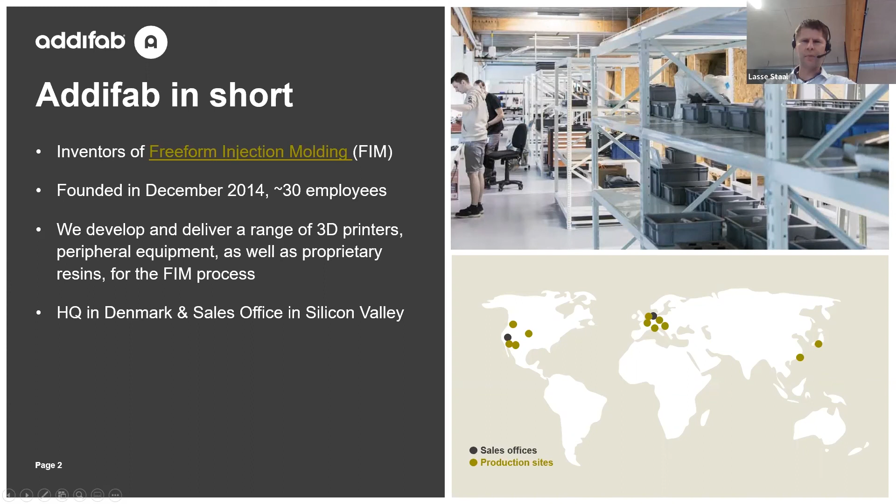If we look at freeform injection molding from the process point of view, what we have developed is a perfect integration between the 3D printing and the injection molding. The objective has been to ensure that product developers do not have to compromise between the design freedom, short lead times, and low startup costs offered by 3D printing, and the versatility and scalability that is the domain of injection molding. So we have developed some software that will help users automate mold design and mold preparation.

We have developed some printers and other hardware that is also available. Of course, with the Nexa offerings, we are dramatically expanding what we can do in terms of size, in terms of productivity, but I'll come back to that a little later.

Following the 3D printing, we will need to clean the printed tools. That's pretty standard. For any DLP, SLA, or LCD printing, resin will have to be removed from the surface of the tooling. And we will also need to post-cure the parts to make them ready for injection molding.

Injection molding happens using standard injection molding equipment like the Babyplast setting over here, which was to take place in the live demo, but I guess I'll have to use pre-taped recording since I cannot hold my laptop and manage the machine at the same time.

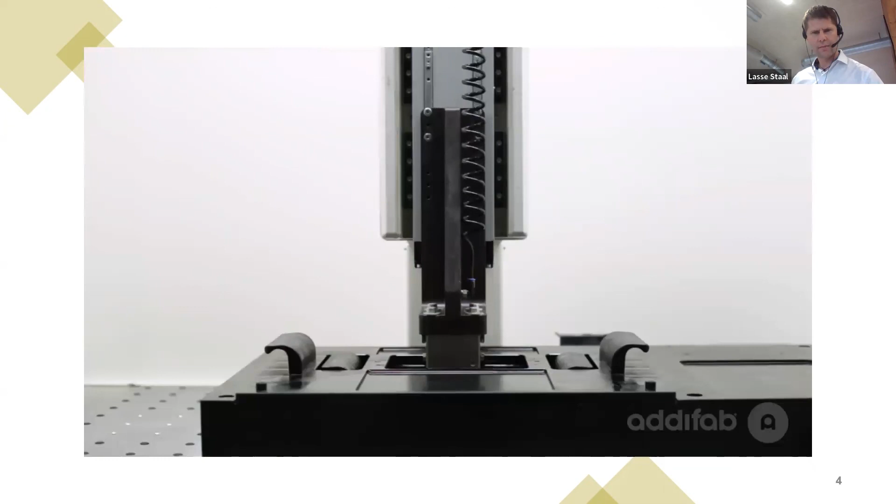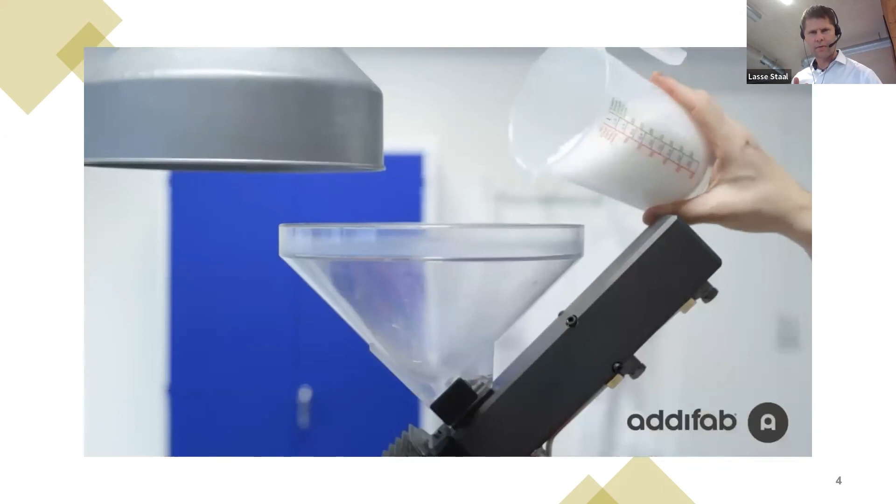So freeform injection molding, as mentioned, is about 3D printing injection mold cavities or injection mold parts for cavities. The printing principle is DLP, or with the Nexa systems, we use LCD, which allows us to create a large number of printed tools in the same process.

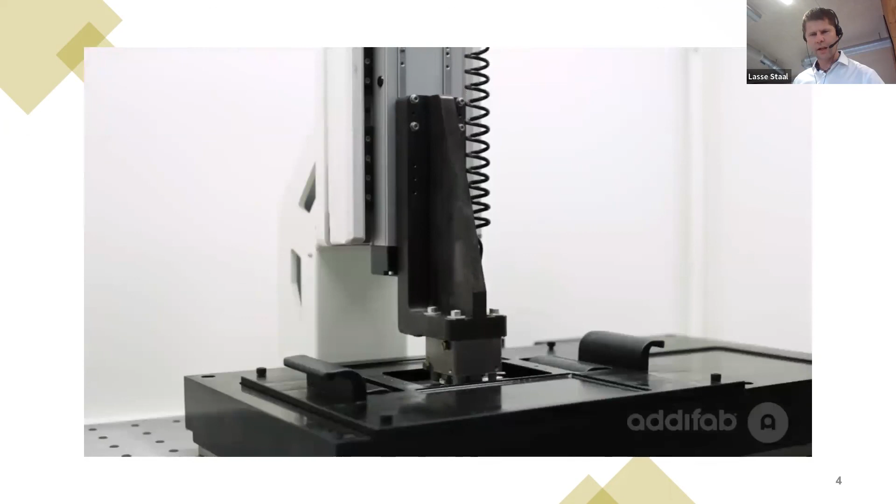When Addifab was working with the Addifab machines, we had the opportunity to print approximately 15 tools with the printer. Now with the Nexa, just to provide you with a little bit of insight about sizes, we can do 120 molds in the same time. That means the time to print one of these injection mold tool cavities is 15 seconds with the Nexa system.

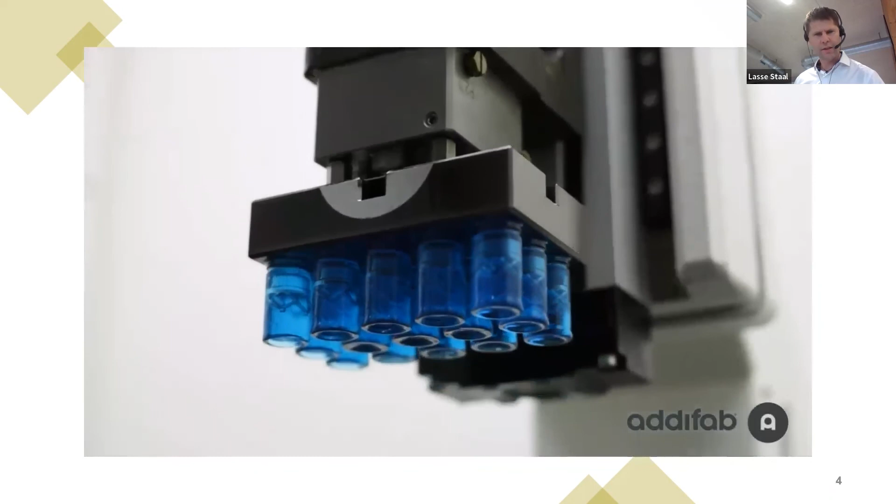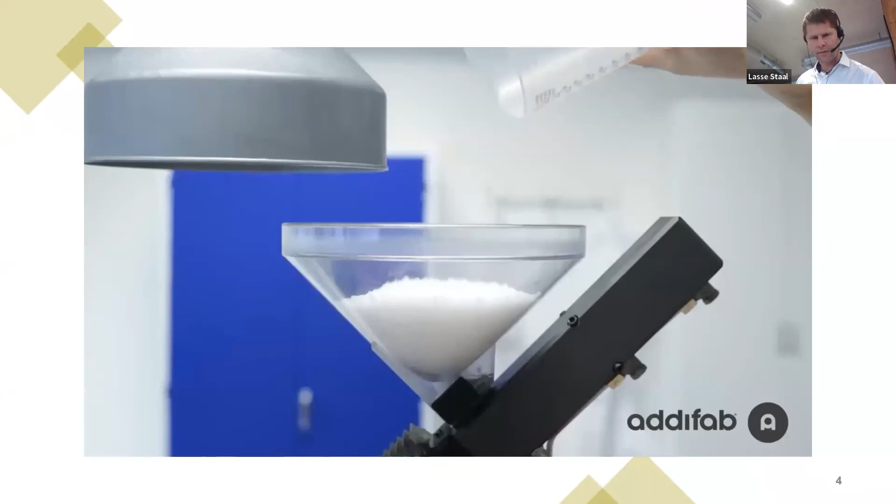For injection molding, we use any standard injection mold machine. In this case, it's the Babyplast, with any granulate you may think of. We do PEEK, we do metal, we do ceramics. The objective is to provide the injection molder with the same degree of choice that he would have with any other technology.

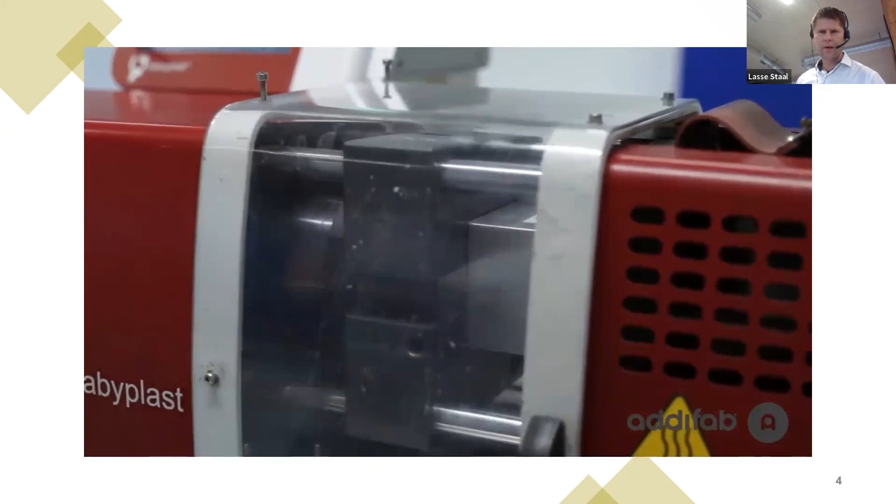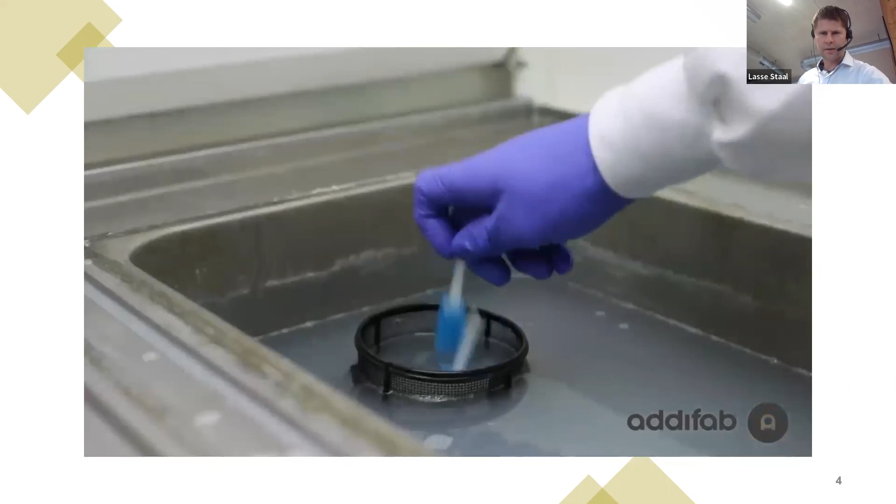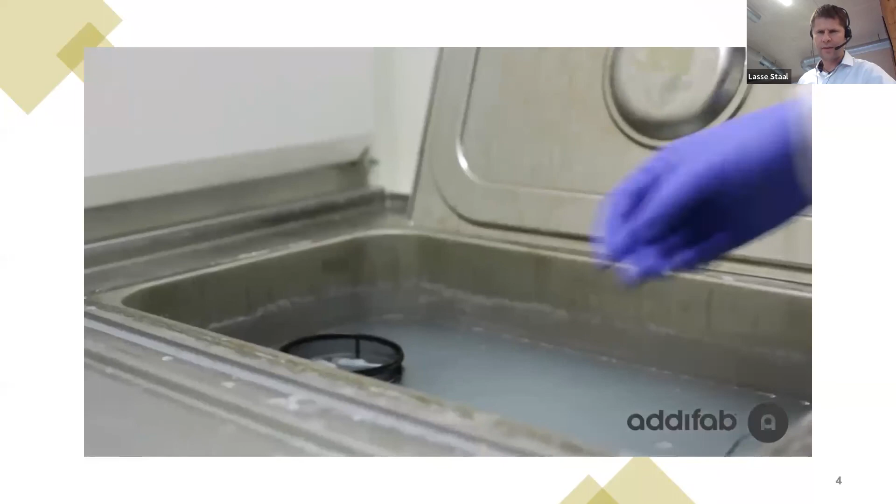And then following the injection, where the material is squirted into the tool, follows the demolding, which is that part which provides the injection molder with an unseen level of design freedom, since we don't have to worry about sliders or split lines or drafts or any of the complications usually associated with injection molding.

So freeform injection molding is injection mold tooling, is injection molding with the key benefits offered also by 3D printing in terms of short lead times, low startup costs. And for your information, the tools we were looking at here have an average production price of a couple of euro, which means that of course your unit costs increase slightly, but compared with the price, the cost, the investment that would be needed for injection mold tooling of this complexity, a couple of euro a shot is pretty trivial.

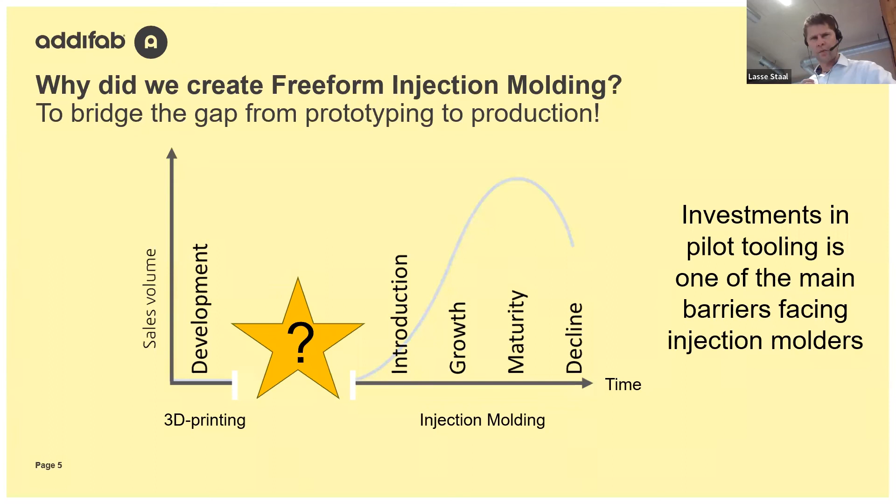The reason why we have invented and are pioneering freeform injection molding is because when you look at product development from the injection molder's point of view, getting from 3D printed prototypes to injection molded products is a key challenge. And the challenge is primarily associated with investments in injection mold tooling.

Of course, we would like to offer a solution that spans more than just product development. One key benefit of using freeform injection molding is that once you define your recipe for injection molding your low volume products, that recipe follows your product throughout the life cycle. This means you may want to migrate to conventional steel tooling for mass manufacturing, but whenever a customer wants a customized version of your high runner product, you can simply resort to 3D printed tooling to meet the demands of that low volume manufacturer.

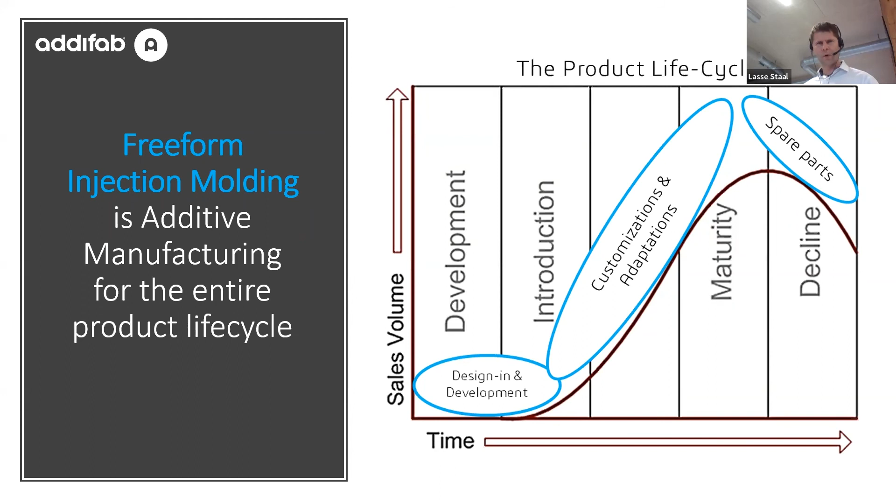When you start talking about spare parts manufacturing later in the product lifecycle, you'll be happy to know that instead of stockpiling items that may have to be written off and discarded at the end of the product lifecycle, you can produce your spare parts on demand, reusing that low volume production recipe you compiled in your design phase. So for all intents and purposes, what we are delivering with freeform injection molding is a total product lifecycle management solution.

The reason we are teaming up with Nexa3D is because at Addifab, we have been dedicated to manufacturing small, high precision items, but we've also received a lot of requests from customers wanting bigger printers and printers with higher productivity. So what we've been focused on until today has been small parts up to 5 centimeters and batch sizes up to about 20.

Now, with the Nexa, we can substantially increase our approach to market. We can substantially increase the number of applications we can support with freeform injection molding, and we can support a much higher level of production than we have previously been able to do.

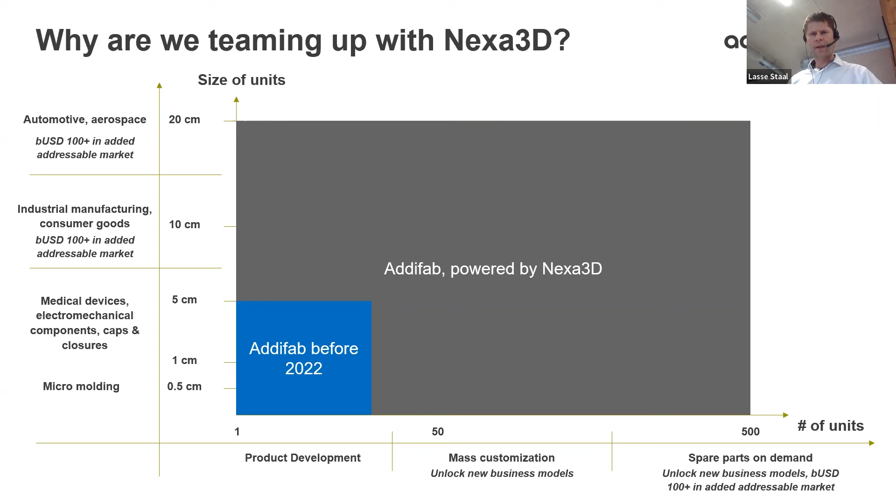People are often asking us why we are different from conventional 3D printed tooling. We are not the first, we're not the only company in the world offering 3D printed tooling, but I think the design freedom that comes from having soluble tooling is a key part of what we offer. Another key part is the very extensive selection of materials that comes from not having to optimize for as many shots as possible.

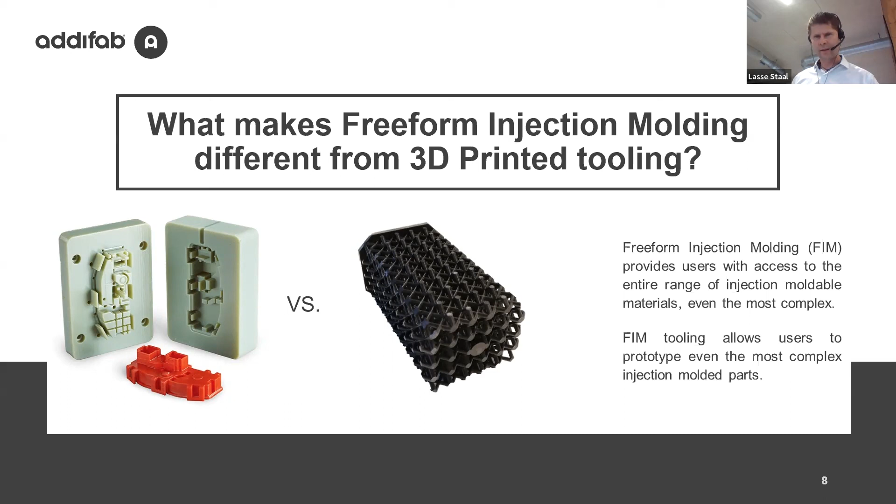What you see in this image is a black part made in a high performance PPA with a 30% carbon fill. This part has a weight of 70 grams. It carries more than 4.5 tons of load, and it is enabled by the solubility that is the key feature of freeform injection molding.

When we look at freeform injection molding compared with conventional injection molding, one thing that is evident from the start is that when we want to manage complex components, we can do so at a much lower price point. This is an example of a fairly complex tool, with a couple of side actions and a lot of complex split lines. You could basically achieve the same functionality with a one-piece 3D printed cavity if that cavity was soluble. That means that with freeform injection molding, especially high complexity components become a lot easier to source in low volumes.

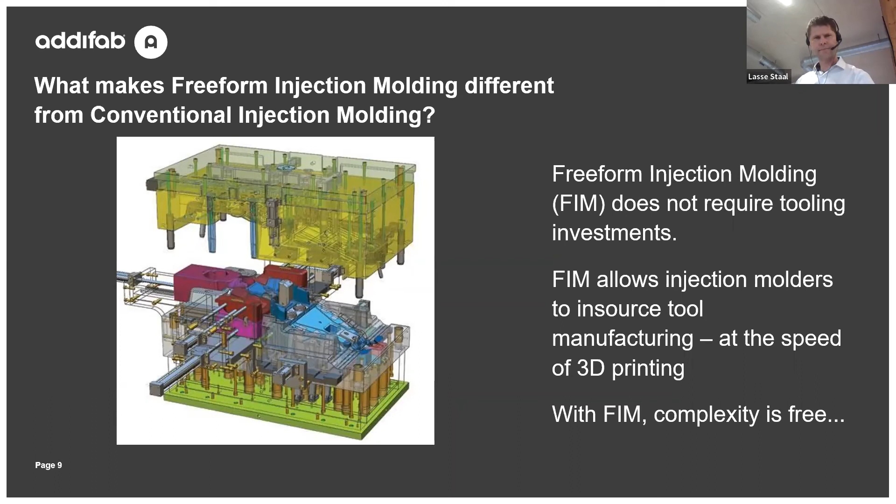A topic that is creeping up on the agenda in a lot of places is sustainability. At Addifab, we decided to investigate the environmental profile of freeform injection molding when held against conventional metal tooling. We carried out a life cycle analysis with Deloitte, the world-leading auditor handling the mathematics. What we saw was a substantial reduction in CO2 emissions associated with the product development.

As a matter of fact, freeform injection molding allows us to reduce carbon dioxide emissions by 75% compared with reference pilot tooling, in this case for the manufacturing of a 4-part medical device for preclinical trials. Most of those savings come from not having to iterate in a hard tool, from not having to manufacture a hard tool, but we also see substantial savings in not having to run in a hard tool, because with freeform injection molding, you shoot once or twice, and then you're basically at the stage where you should expect to see fully molded parts.

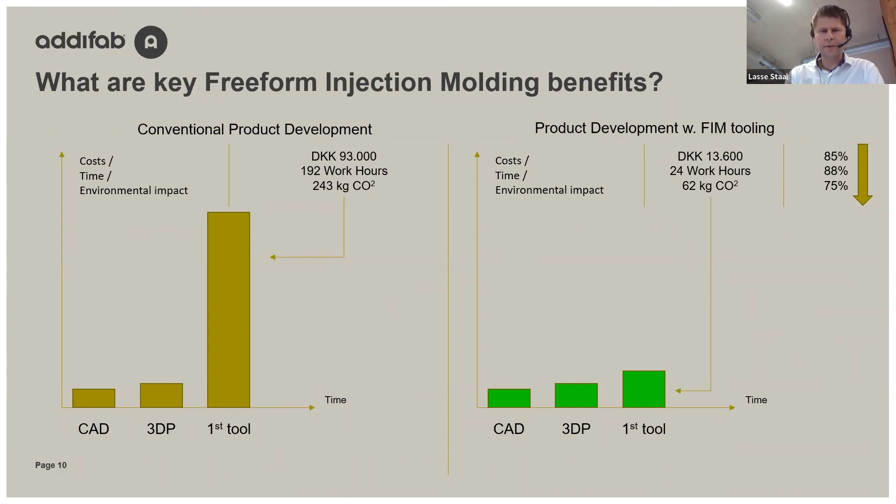When we look at what people have been doing with freeform injection molding, the scope of application is extremely wide. And that is also one of the key benefits that we see with this technology. Whenever you need injection molded parts, and sometimes even when injection molded parts would not normally be useful, we can probably help with freeform injection molding.

Looking at a couple of examples, and I can share this presentation afterwards so you won't have to sit here watching the screen. Sustainable materials and recycled materials are often not available in filaments or powders. Most material manufacturers will want their materials to be injection moldable, and freeform injection molding is becoming a very useful gateway for these material manufacturers to get their materials into the hands of developers.

In one case, the developer was a UK person wanting to do shirt buttons with recycled materials, but we've also been making prize awards for innovation contests.

Conductive polymer parts may be useful if you want to start using antennas for your car or similar. In this case, we had to collaborate with Harting and Mitsubishi Chemical in order to get this unique combo to work.

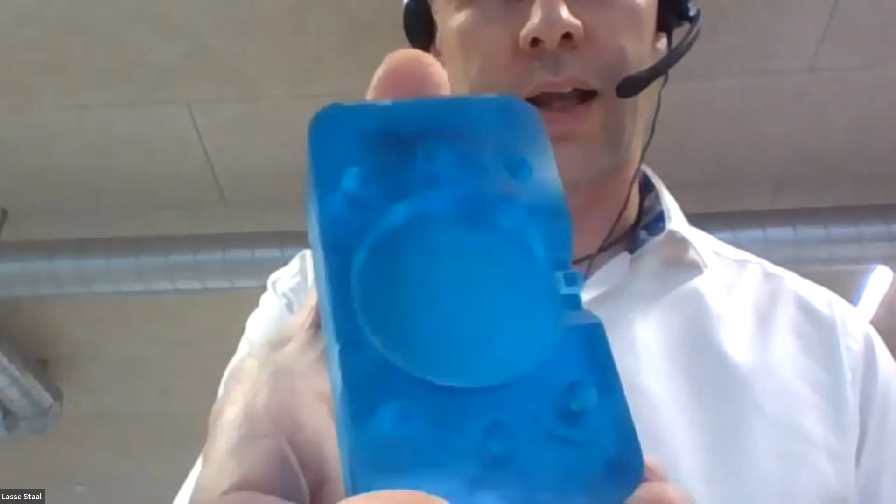Thanks, Jan. So this is the top part of a tool used for manufacturing a threaded cap. The midsection, which takes care of the inner geometry of the cap, has been taken out of this tool and it has been demolded, or dissolved.

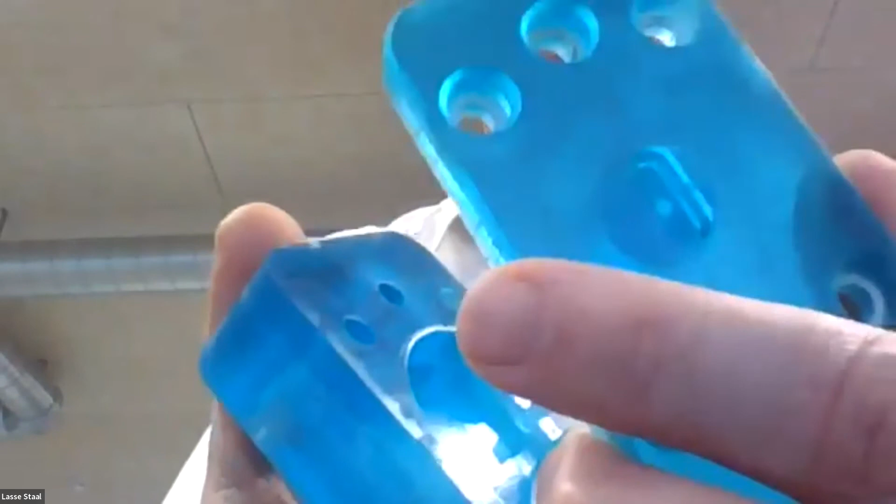And then we've got a bottom portion, in this case, with an inlet, which is also removable. The reason we've got this removability, the reason we're taking the tool apart before dissolving, is because we want to save as much time as possible. We want to potentially reuse our parts, and we want to be able to evaluate what comes out of the injection mold machine before we start demolding. So quite a few of the tools we make are actually split tools that are partially taken apart before dissolving.

Awesome. And then about the inserts. Yeah, go ahead. Allow me to fetch a second box. And thanks, by the way, for the great questions. We have several more coming up. Don't worry, I'll be here. We have enough time, so please ask more questions.

So this is another cap, or an essential part of a mold for a cap. This particular cap is a spray cap, which means it has a pretty intricate inner geometry. I cannot show the cap itself for confidentiality reasons, but I can show you a couple of the tool principles. We've got a mold base and a 3D printed tool part, and I can use the combination to create a feature that would be impossible with a purely printed tool, and that is a lot more cost efficient to manufacture than a complex tool with side actions, sliders, and other complications. So this is a way to combine the best from conventional metal tooling and 3D printed tooling to achieve lower lead times, lower tooling costs, and parts that come out quite a lot faster than what would have otherwise been achievable.

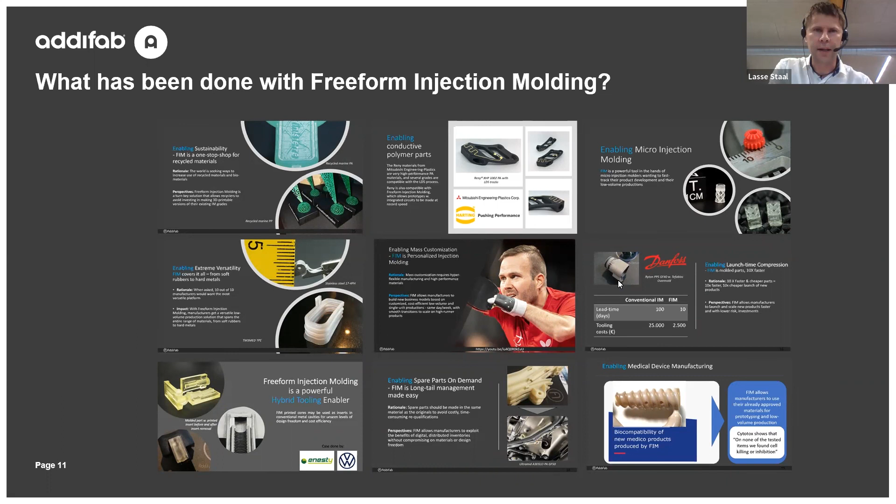So there was a chat question which I answered about the hottest thermoplastic you could take in. Maybe you could answer it more technically - what's the maximum temperature thermoplastic material? I'm assuming it's some kind of filled PPA, PPS, or something like that, which you have shot into a mold of yours. Can you throw more light on the conditions? And the second sub-part to that is then the materials, the resin - it's not the same resin, right? So I'm assuming there are different molds. So for a hot material, is it the same blue material you showed, or is it a different formula? So could you please throw light on that? Absolutely.

So the holy grail in every manufacturing process that I've heard about is PEEK, because it's insanely hot when injected. And we've done standard PEEK, we've done carbon filled PEEK. I wouldn't say since the beginning, but we were pretty quickly faced with demand on PEEK parts from several manufacturers.

Now, PEEK is a pretty special material. It's crystalline, which means that it has to cool down at a specific rate. And what we see with the PEEK is that for very thin walled components, we are not able to achieve the crystallinity that you can achieve with a heated metal tool. Once walls start getting thicker, it actually becomes a benefit that the mold is a good insulator, because it means that the PEEK cools down slowly. But if we have thin-walled parts, we need to post-anneal the PEEK.